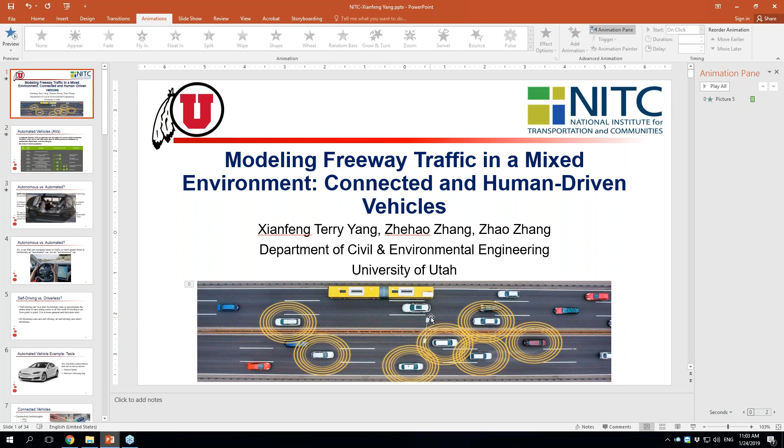All right. Hi, Lisa. Are you able to see my screen right now? Yes. Yep. We can see your screen. It's not in the full screen setting yet. There it goes. Okay, cool. So thanks a lot, Lisa, for the introduction, and good morning for the people from West and Midwest, and good afternoon for the people from the Eastern Coast.

Today I'm gonna present some of our work related to modeling the freeway traffic in the mixed environment, which means we have both connected and human-driven vehicles on the road. So this is a joint work with my master student, Zhehao Zhang, and my PhD student, Zhao Zhang, both of them from the University of Utah.

So firstly, I want to briefly talk about the definition of the automated vehicles, for short AVs. So the automated vehicles are operated with the support of different vehicle automation functions, which definitely rely on the real-time sensor data for making the maneuver decisions. So here the maneuver decisions include acceleration, deceleration, and lane changing behaviors.

And so the SAE provides the definition of 6 levels of vehicle automation, and I'm pretty sure a lot of people are familiar with this table. Without any automation function, that would be defined as level 0, and with a full automation function, that would be level 5. And right now, most automated vehicles that have been put on the market are around level 2. But I just got the news a few days ago saying that Waymo has announced that they're going to start to produce level 4 automated vehicles.

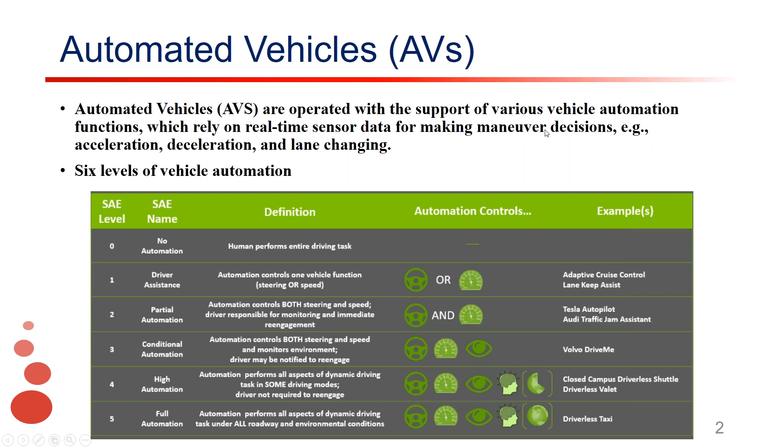And for the following slides, I want to talk about the difference between autonomous vehicles and automated vehicles. I'm pretty sure everyone heard this kind of terminology, including automated vehicles, autonomous vehicles, driverless car, self-driving car. All of those terms sound pretty similar to each other, and even I have been confused by those terms for a long time. But technically, there's definitely some slight difference among those terminologies.

The first one, we want to look at the main difference between the automated vehicle and autonomous vehicle. In terms of definition, an autonomous vehicle is a car that is capable of sensing its environment and navigating without human input. So we can consider level 5 vehicle automation as an autonomous vehicle.

And there's a Nissan engineer's comment about the autonomous vehicle, saying that a true autonomous vehicle would be the one where you request it to take you to work, and then it decides to go to the beach instead. That is a joke, but to see it more plainly, a truly autonomous car would decide on destination and the routing plan, as well as the control within the lanes.

Our future car will definitely be the autonomous vehicle, and everyone can just sit in the car, set up the destination, and enjoy life in the car. You can do whatever you want. You can watch a movie, read a book, even attend a webinar in the autonomous vehicle. But definitely, we still have a long way to go to achieve autonomous vehicles.

So the conclusion is a car that can navigate the lanes or traffic or mind speed limits is technically an automated vehicle, definitely not an autonomous vehicle. The next difference we want to discuss is about self-driving and driverless cars. Self-driving car is a term Auto Trader used to encompass the entire idea of a car doing some of the work of moving from point to point. So it is a more general and inclusive term.

In other words, the automated vehicle would be considered a self-driving car, but the driverless car would be something similar to the autonomous vehicle, totally operating the vehicle without human input. All driverless cars will be self-driving, but not all self-driving cars are driverless. That is similar to the difference between the autonomous vehicle and automated vehicle.

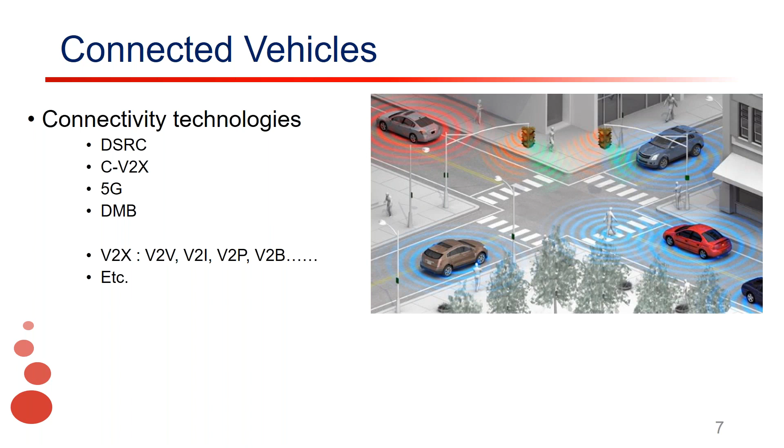All right, so now if we merge the connectivity technology with the vehicle automation function, that will give us connected automated vehicles. The connectivity technology will allow the exchange of traffic information between the vehicles and infrastructure. And the vehicle automation function will automatically adjust the speed in real time according to the desired speed and distance to the vehicle ahead. So basically, for our future car, the control logic is the sensor on the vehicle will provide the driving environment information. Then, along with the connectivity, we'll gather information from the other vehicles.

Then, the vehicle will be able to provide both warning function and control function. In terms of control, right now it's basically the speed, acceleration rate, and deceleration rate, and warning will be the lane changing support function when the driver decides to make lane changing behaviors.

And now with the connected automated vehicle, CAV for short, we want to briefly talk about the CAV operational environment. CAVs are typically equipped with communication devices, for example DSRC or C-V2X, as we just discussed, and also onboard sensors. So right now there are 3 different types of sensors being implemented to support the vehicle automation functions, including the radar sensor, the LiDAR sensor, and camera sensors.

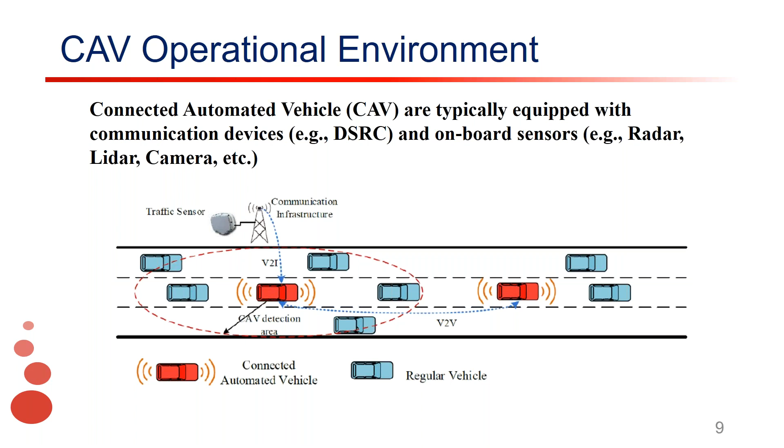With the communication device, CAVs will be able to talk with each other and also get information from the communication infrastructure, usually the roadside unit. Also the detection function on the CAV will be able to detect the existence of other human-driven vehicles and may help the vehicle automation function make maneuver decisions. So that would be the typical operational environment, which, as we mentioned, is a mixed environment that includes both CAVs and HVs on the road.

And with the CAV technology, here are a few popular CAV applications on the freeways. Definitely on signalized intersections, we have other applications such as green speed control and traffic signal optimization with connected automated vehicles, or transit signal priority as the Utah State is doing right now. But in this project, we're mainly focused on CAV applications on the freeways.

So the first application is called cooperative adaptive cruise control, CACC for short, and that is also one of the favorites of USDOT, and they have been putting a lot of effort into testing CACC on the freeways. The logic is we have a bunch of connected automated vehicles, and with V2V communication technology, they can follow each other and form a platoon of vehicles on the freeway.

In that case, we can allow a much shorter gap between those connected automated vehicles, and by doing so, we can help reduce traffic congestion and also improve roadway capacity, because we have a much shorter gap between the vehicles. And also because the CAVs follow each other, the fuel or energy consumption will be reduced for the following vehicles, because they have much smaller air resistance when they are driving on the road.

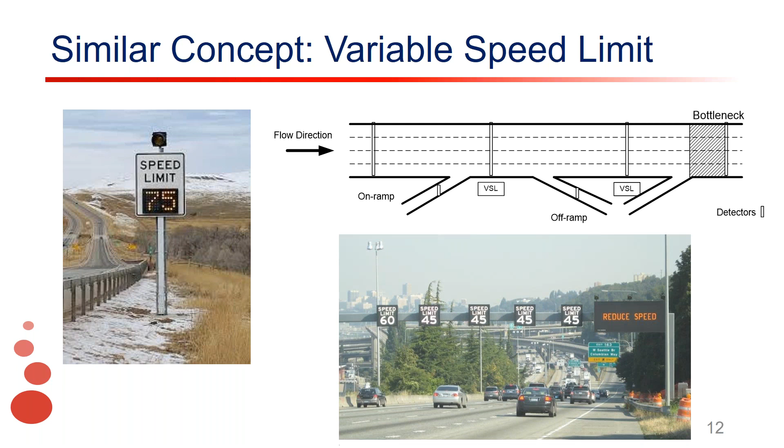So that would be very similar to speed harmonization with connected vehicles, but the difference is the first one provides advisory speed via the vehicle-to-infrastructure communication channel. The other one provides advisory speed to all of the drivers with the variable speed limit sign. In some other countries like Germany, they also implement variable speed limit control on the freeway, but they allow different speed limits on different lanes. But in the US, in most cases, we just provide the same speed for all the lanes on the freeway.

So before we move to the modeling of traffic state under the connected vehicle environment, I want to briefly talk about the variable speed limit control logic. Firstly, we usually divide the freeway into a bunch of sub-segments, we put the variable speed limit signs there, and we put detectors to gather the real-time traffic information. Then we rely on a traffic flow model, which is able to tell us the corresponding travel time, travel delay, or throughput, given the different values of the variable speed limit sign. Based on that logic, we can produce the optimal speed to the drivers. So that would be basically the variable speed limit control logic.

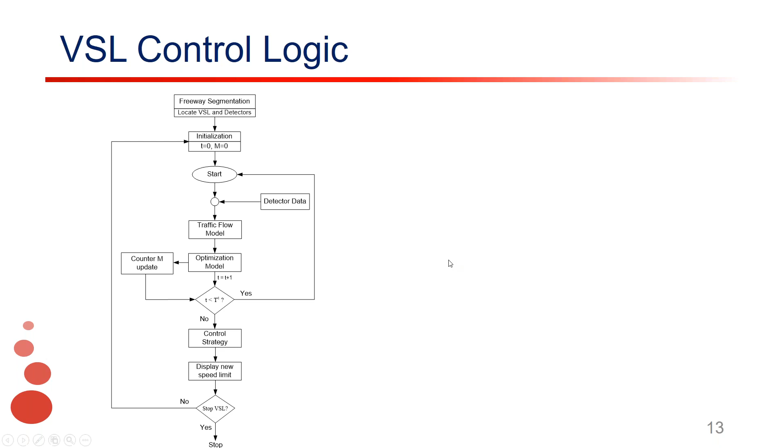We can observe that the effectiveness and efficiency of the variable speed limit control will definitely rely on the accuracy of the traffic flow model. So how you measure the traffic, how you estimate the traffic state, given the information from the detectors. Because in most cases, we only place a bunch of detectors on the freeway. For example, we put an upstream detector to gather the inflow, and a downstream detector to get the outflow, and we may or may not put some detectors between them. Sometimes we also put detectors on the on-ramp and off-ramp to gather the on-ramp flow and off-ramp exiting flow. So we have a very limited number of detectors implemented.

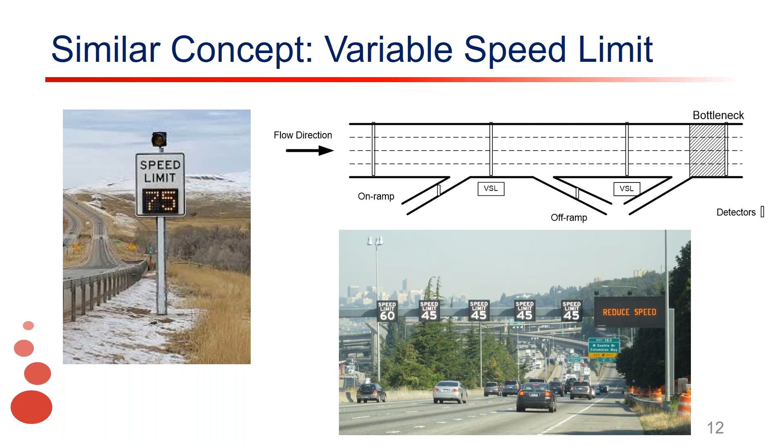So definitely we need a traffic state model that can help us estimate the traffic state performance over the entire freeway segment. And because we want to do real-time optimization, we need a very efficient traffic state model. In terms of traffic estimation, there are three levels of models: macroscopic, mesoscopic, and microscopic. In this case, we will use the macroscopic level, which is the most efficient model for real-time operations and optimizations.

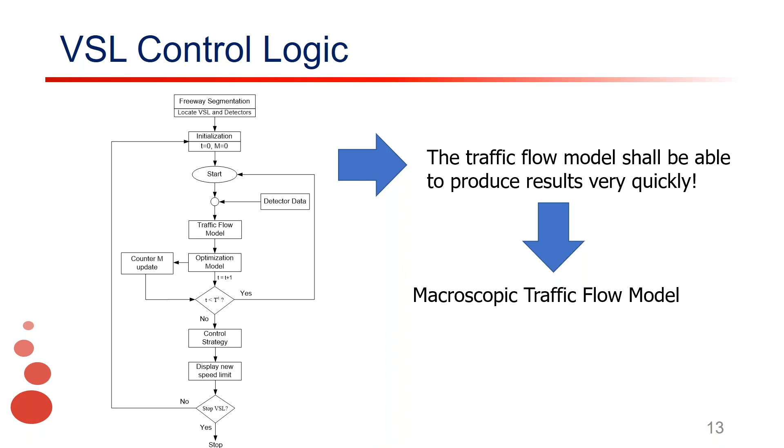So here we're going to use the macroscopic traffic flow model to support the variable speed limit. And then also we borrow that idea back to the traffic state estimation under the mixed environment, including connected vehicles and human-driven vehicles. So now let's briefly talk about the macroscopic traffic flow model.

So the traffic state estimation has long been identified as an important task within the traffic control loop. And as we mentioned, reliable traffic flow estimation is the foundation of many good traffic management strategies, including the variable speed limit control, the speed harmonization with connected vehicles, and also the ramp metering control.

And under the mixed traffic environment, which includes both CAV and HV, the CAV can definitely affect the whole freeway traffic state by changing their motion state, because CAVs are sharing the road with the human-driven vehicles.

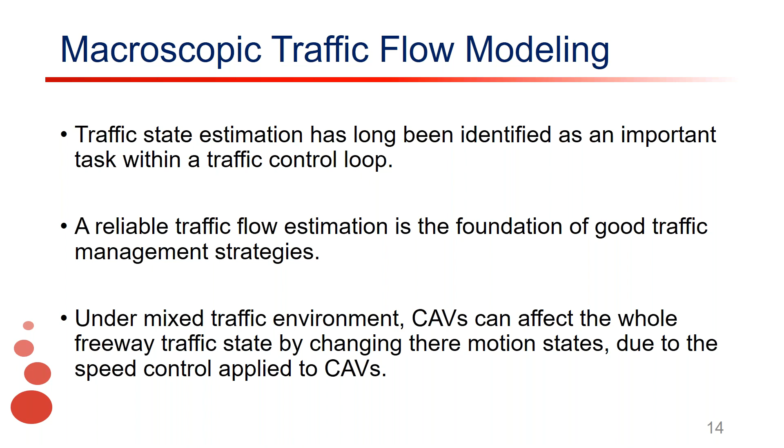Now, let's briefly talk about the conventional macroscopic traffic flow model, which is also the second order traffic flow model. So to analyze or estimate the traffic state on the freeway, as we mentioned, in most cases, we're going to divide the freeway segment into a bunch of subsegments. And in most cases, the length of each segment will be around either 500 meters or a half mile, and we cannot make the segment length too short, because we don't want the vehicle to jump from one segment to another during the study interval.

Usually the simulation interval would be like every 10 seconds. So for example, we don't want the traffic to travel from segment 1 to segment 3 and totally pass segment 2 during that 10 seconds. So that's why in most cases we set the length of the segment to be half mile or 500 meters.

And in each subsegment, we are particularly interested in three factors, including the flow rate leaving that segment, here we use q_i(k) to represent that, and also the density, in terms of the number of vehicles within that segment, and also the mean speed. So here the mean speed refers to the space mean speed. So we'll be interested in estimating these three factors within each segment.

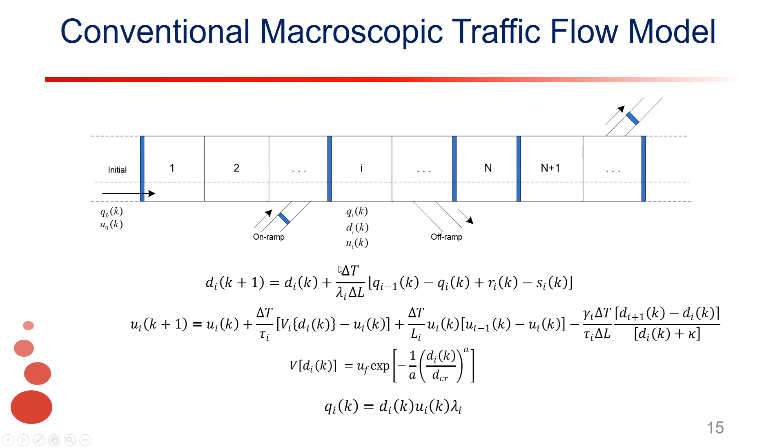Then we have a fundamental diagram relationship to estimate the flow based on the density and the speed. So basically the flow equals the density times the speed. Then that provides us the flow information. So with these three equations, we can somehow estimate the traffic state on the freeway segment. And the detectors placed on the freeway will provide us the q information and the r and s, which is the on-ramp and off-ramp information.

And now let's talk about the mixed traffic flow pattern. So as we mentioned, there will be a bunch of CAV applications such as CACC, cooperative adaptive cruise control, and the speed harmonization. So in those applications, those CAVs will be operated with different speeds compared with the HVs, because they're getting the advisory speed from the infrastructure. And then we can expect that the speed change or optimization of CAVs will definitely affect the speed of the HVs, because they are sharing the road.

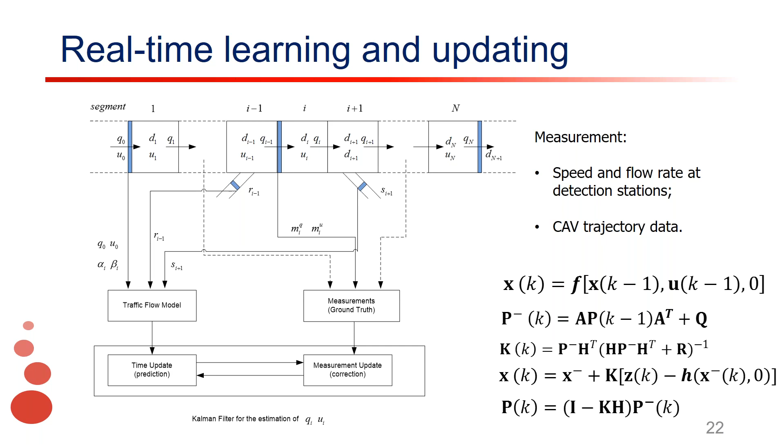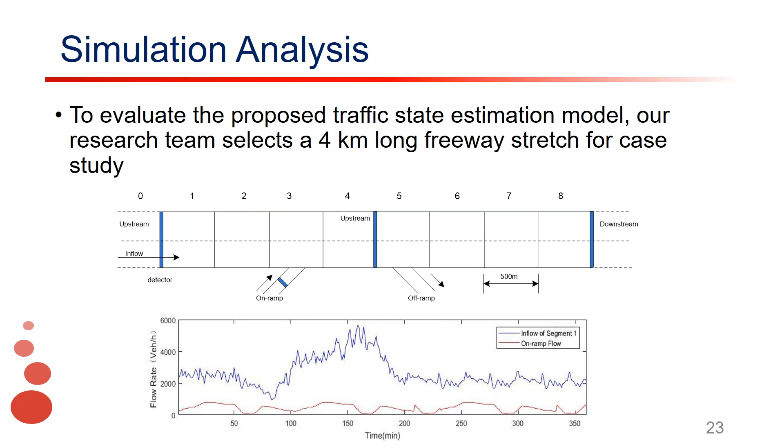Okay, so now let's move to the last part, which will be our simulation analysis. And we select one freeway segment in Salt Lake City on the I-15. So the entire freeway is 4 kilometers long, and we divide that entire freeway into 8 subsegments from segment 1 to segment 8, and this will be the flow direction. And also we collect the inflow information and the on-ramp flow information from the PeMS database operated by UDOT.

And since we want to somehow simulate the traffic condition under the mixed traffic flow pattern, and in that case, we expect that the CAV will be operated with different speed compared with the HVs. So here we come up with an optimization model to optimize the CAV desired speed profile following the logic of speed harmonization.

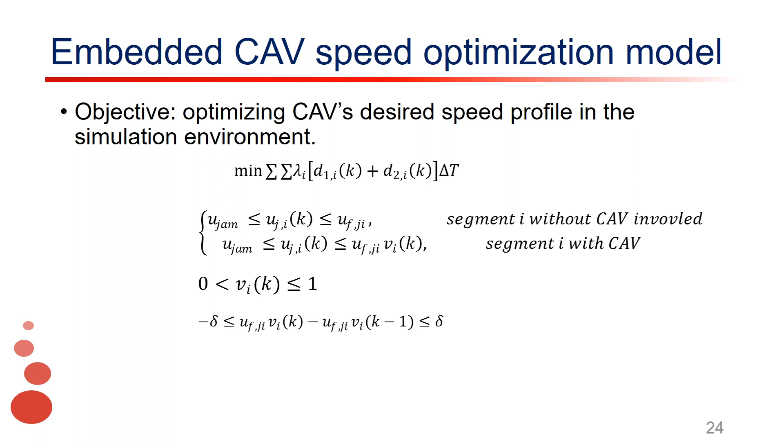So here the objective function is to minimize the total travel delay, the total travel time along this freeway segment, and the output will be the desired speed of the CAVs on every subsegment along the freeway. And this function will be able to generate totally different speed profiles for the CAVs, which will be definitely different from the human-driven vehicles.

And to evaluate the accuracy of the proposed macroscopic traffic flow model, we consider 2 different scenarios and 2 different models. The first model is the one without the extended Kalman filter, and the second one is the one with the extended Kalman filter. We didn't put the comparison with the conventional macroscopic traffic model here because the result is really bad. So we only provide a comparison between these 2 models.

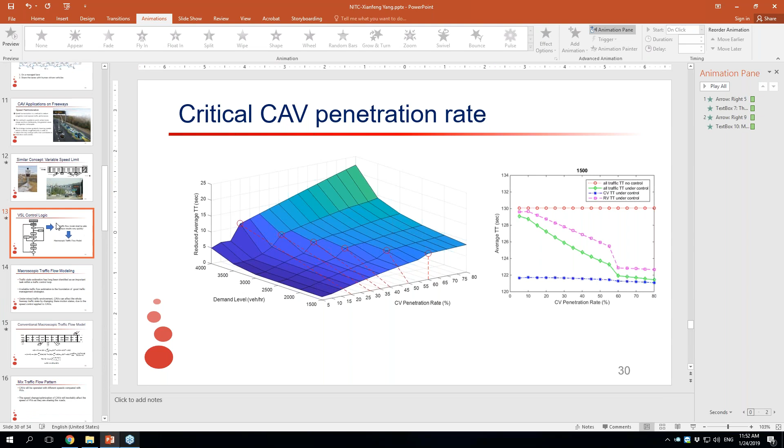The first question refers to a flowchart on slide 13, Terry, and they ask, how were the CAV features considered? Slide 13, okay. So this one is not the flow chart for CAV speed harmonization. It's just an overview of a very similar concept, that is variable speed limit control.

So in this flow chart, we don't really consider the connected automated vehicles, but instead we consider providing the variable speed limit to all the traffic. But in real-time operation, we can consider there will be some vehicles willing to follow the variable speed, but some others may not. So we still have the compliance rate of the speed limit in this study. So that would be similar to speed harmonization under the mixed traffic pattern.

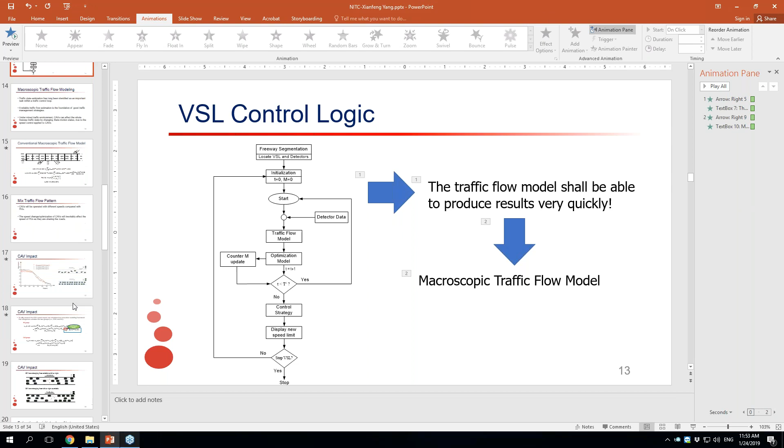Okay. And a question on the model with the EKF matched to the ground truth, mentioning that the results matched very well. Is there a chance that this may have overfit the data? So there's no overfitting here. It's different from other machine learning techniques like regression or support vector machine.

So here it's like a real-time estimation correction. So at every time step we have an estimate, let's say 50 miles per hour, and we have the ground truth to be 63. Then for the real-time correction, the extended Kalman filter, the EKF, will help us to change the estimate from 50 miles per hour to, for example, 58, which would be much closer to the ground truth.

So there are no real overfitting issues here, because we're not going to use the estimate to model the other traffic condition. We'll only use the estimate for the specific case. So that would be a kind of real-time correction in response to the reality.

Okay. And then a follow-up question was asked: how many days of data or ground truth have you compared the model to? So in this study, we only picked up 1 day of data; it's actually not even 1 day, it's 350 minutes of data for comparison.

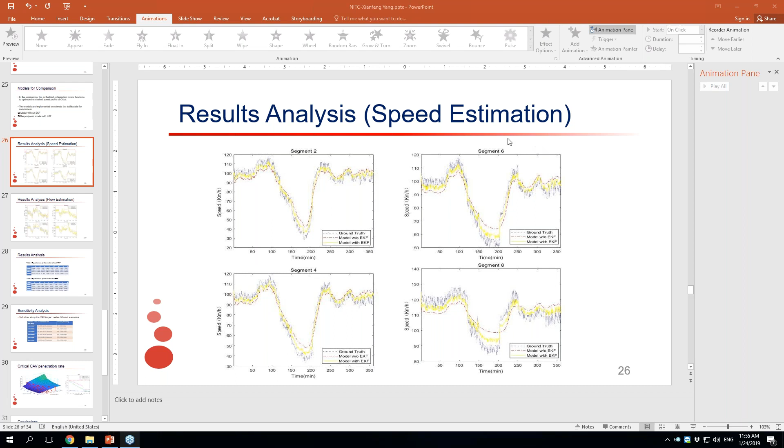In one of the earlier slides, you talk about the different automation levels. It seems like you said that level 3 is where this work is focusing. And I was curious if you knew any projections on penetration rates for these types of vehicles, using that Tesla as an example.

Currently, the penetration rate would be really, really low. I think definitely that would be less than 1% on the road. But people are expecting that in the future there will be definitely more automated vehicles on the road, especially with the development of sensing technology. The price of the vehicle will be reduced a lot. In that case, maybe most people will be able to afford automated vehicles.

But currently, those automated vehicles are really expensive, and that's why the current penetration rate is really, really low at this moment. Great.

And then one more question, and we can wait a few more minutes if there are any additional questions from the audience. With this research, you had mentioned it was a small start, a really great start. Where do you see your future research building on this?

So right now we have been using the model as a base to study one of the CAV applications I talked about here, the CACC, cooperative adaptive cruise control. I have one of my students working on this issue, and we also have one engineer from Leidos who is helping us reshape our control framework, because they have a lot of experience implementing CACC on the freeway. So right now we're working on a control model to form the CACC platoon and also to control the platoon on the freeway.